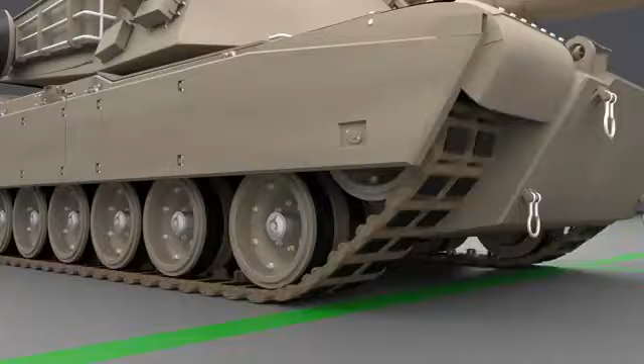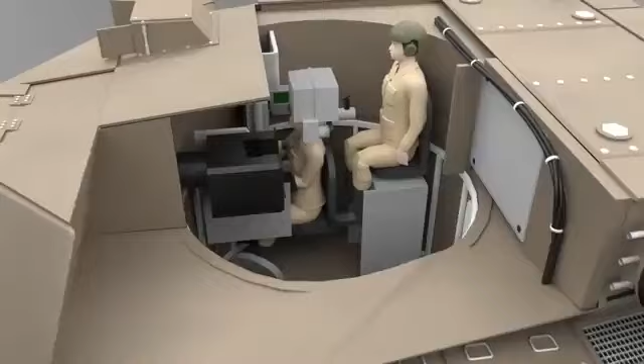For today's video, we're going military. Let's look at how a tank works. We're going to focus specifically on the American M1A2 Abrams tank. We'll look at the caterpillar tracks, the turret, where the crew sits, and the engine in the back that powers it all.

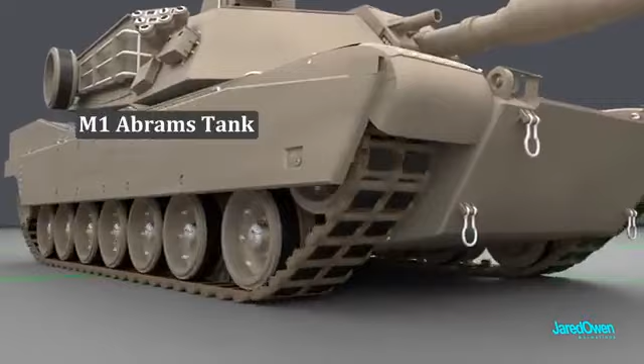The M1 Abrams tank was introduced in 1980. The tank was named in honor of United States Army General Creighton W. Abrams Jr., who was a commander in the Vietnam War. The idea was to keep it low to the ground so it was harder to hit. Angled sides on the tank allowed enemy fire to deflect off the side.

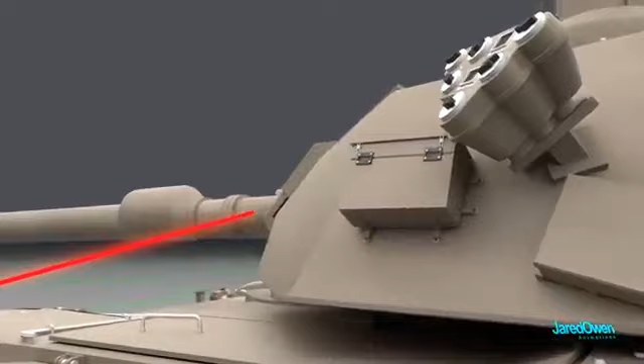It's a bit cozy inside, so I hope you're not claustrophobic. During operations, the crew may spend hundreds of hours inside with very little sleep.

There are many versions of the tank. We have the M1, then came the M1A1, and then the M1A2. There are also minor variants with many different enhancement packages, but to keep things simple, let's just focus on these three major versions. They look very similar on the outside, but there have been plenty of improvements to items such as the armor, electronics, and weapons systems. Each new version is generally heavier and slower, but the increased tech makes up for it. For the rest of the video, I'm going to focus specifically on the M1A2 Abrams tank, though some of what I say will be true of the previous versions as well.

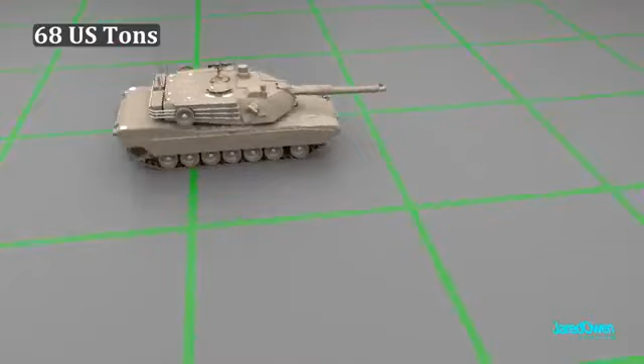Let's look at some specs. The height is 8 feet, the length is 32 feet, and the width is 12 feet. For comparison, here's the size of a person. This tank weighs a whopping 68 US tons, equal to about 35 cars. Even with all that weight, the tank is capable of speeds up to 42 miles per hour.

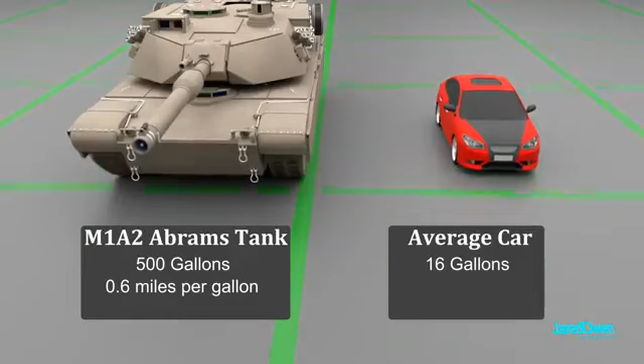It has a fuel capacity of just under 500 gallons. For comparison, most cars can only hold about 16 gallons. But tanks need all that fuel because they only get about 0.6 miles per gallon, compared to the average car at 25 miles per gallon. So it's a gas guzzler, but it's heavy and powerful.

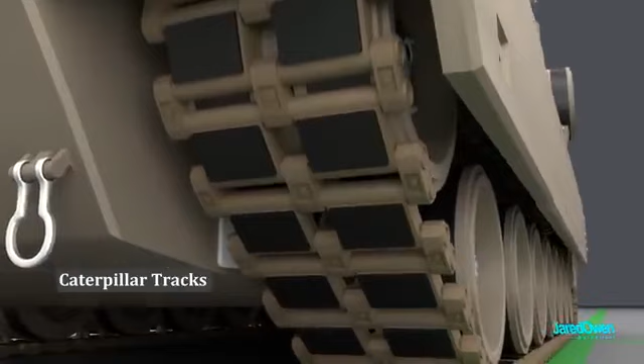Let's look at some of the features of the tank. We have the caterpillar tracks, the wheels—there are 7 on the ground on each side—the main body, which is called the hull, and the turret, which is the part that spins on top and holds the weapons and other equipment. The engine is housed in the very back. The tank holds a crew of 4: 3 of them are inside the turret, and 1 is way up front.

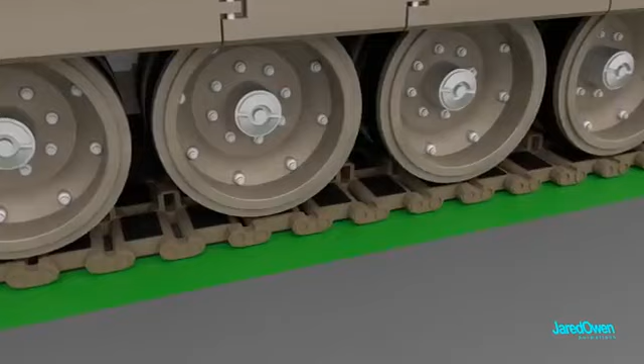Now that we're familiar with the outside of the tank, let's look at more specifics, starting with the caterpillar tracks, sometimes called tank treads. They are made of steel with replaceable rubber pads. There are 7 road wheels on each side of the tank, a raised idler wheel in the very front, and the drive sprocket in the back. This one has gear teeth on it, and it's the only one powered by the engine. It moves the entire track along.

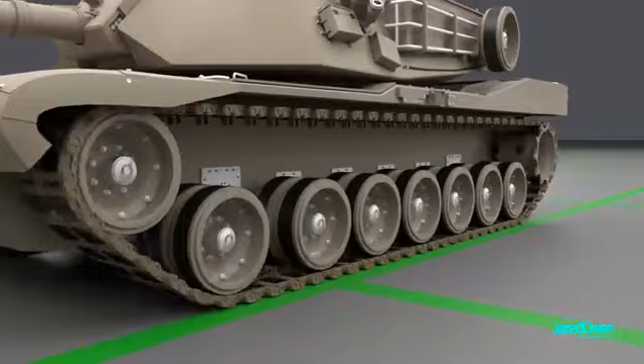The other wheels spin freely as the tank treads move past them. The road wheels also have suspension built into them. The whole reason we use caterpillar tracks is to allow the tank to go over very rough terrain.

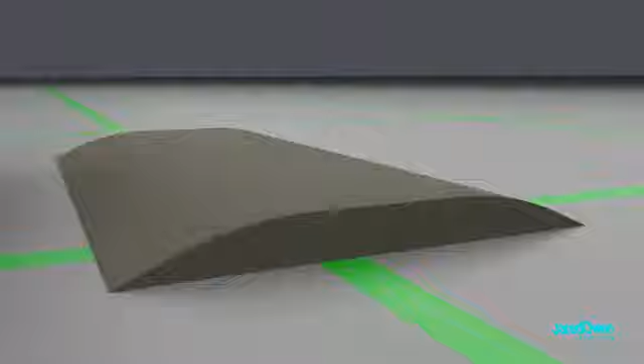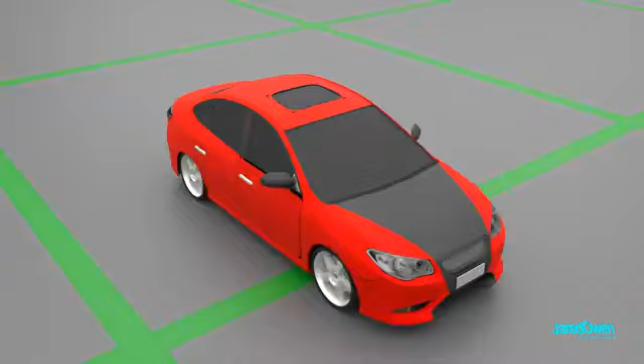Most barriers don't pose any problem for the tank to pass. Regular vehicles with 4 wheels have limited surface area in contact with the ground, so they can get stuck much easier—that's why it's a good idea to stay on paved roads. The tank, on the other hand, has a much larger surface area to displace all of that weight, so obstacles in the way are usually not a problem.

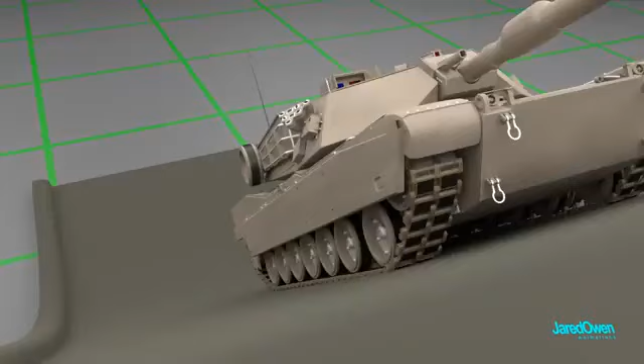The tank can even climb some very steep hills, and most of the time it's still a smooth ride for those inside. The tank is steered by altering the speed of the tracks. For example, to turn left, the right tracks need to move faster than the left tracks.

Unfortunately, the caterpillar tracks are the most likely part of the tank to break. The good news is that the tank usually carries tools and spare parts so that broken links can be replaced and the tank can keep moving again.

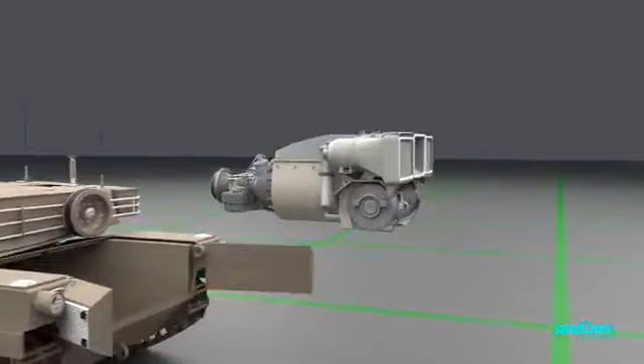Next up is the engine, which is in the very back of the tank. For repairs, the entire engine can be lifted up out of the tank. This is an AGT 1500 engine, which can run off several different fuels, but most of the time it runs off jet fuel.

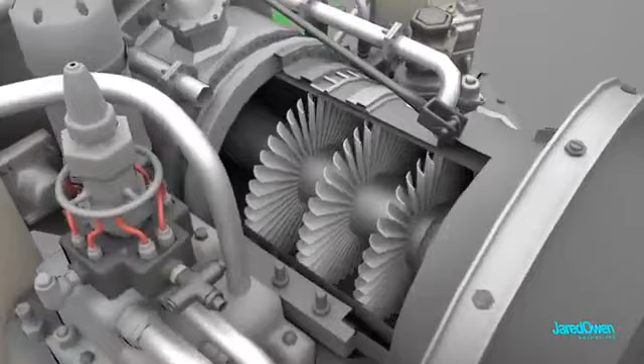In your car, you'll find what's called a piston engine, with these pistons moving up and down to rotate the shaft. But in the tank, you'll find a turbine engine. This one works a little bit more like a jet engine that you would find on an airplane. However, this engine is actually fairly quiet, which is important so you don't give away the tank's position to nearby enemies. The engine gets very hot, so these two side cooling units help remove the heat. The exhaust comes out the back, so stay clear when the engine is on.

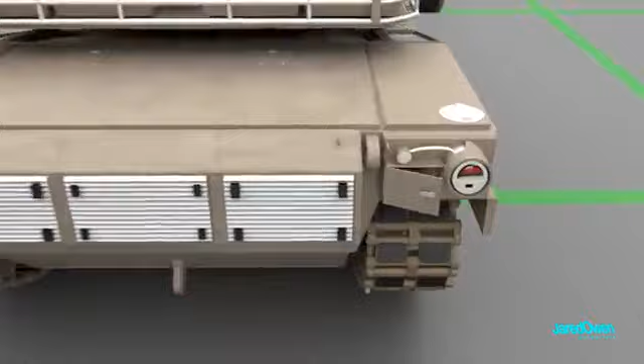There's actually a phone on the back of the tank. This way, soldiers on the outside can communicate with the crew on the inside. The sides have armored plates called side skirts to protect the wheels and the caterpillar tracks. These can be opened up in sections for better access to the road wheels. On the front, there's headlights here and 4 tow hooks down here.

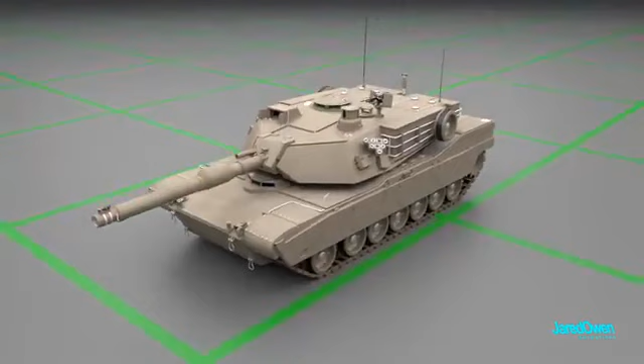Remember, there are many different variants of the M1A2 Abrams tank, so another tank might have slightly different features on the outside. This top part is called the turret. It can rotate all the way around in about 9 seconds.

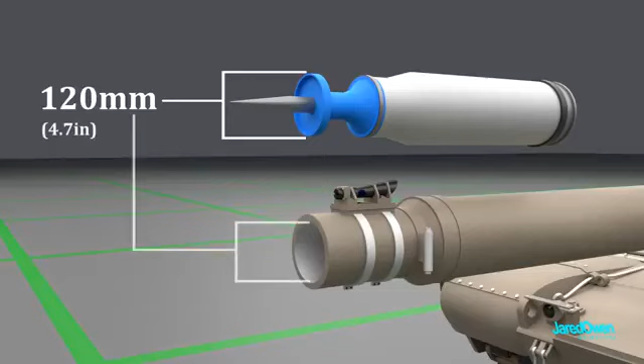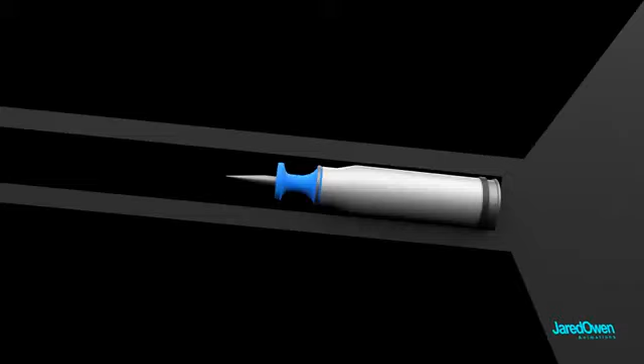This is the main gun, which is a 120mm smoothbore cannon. This means that the shells or ammunition are 120mm, and so is the bore, or the hole, that it goes through. The shells leave the barrel at about 3,500 miles per hour. It can hit a target 2 miles away.

The automatic stabilizers allow the gun to stay locked on targets even while going over rough terrain. This way, the driver doesn't have to stop every time the tank needs to fire. The tank can even spin in place while the main gun remains locked on target.

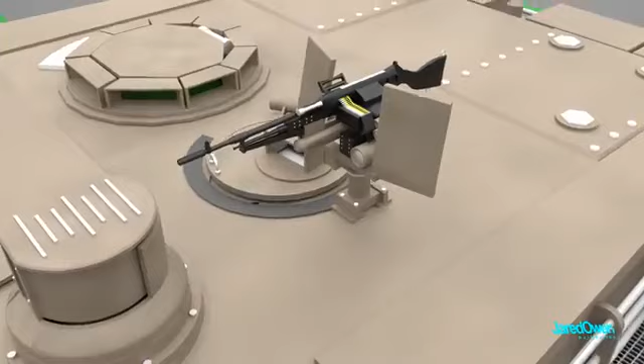Right next to this is the smaller coaxial machine gun. Up on top, there's usually at least one more machine gun to operate. On the sides are smoke grenade launchers. There's one on each side of the tank. These make it harder to be seen during combat.

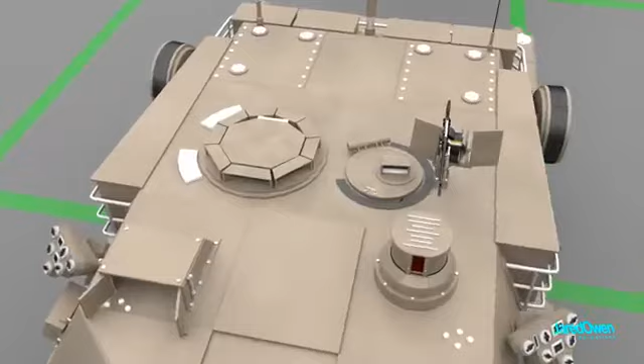There's not much room for equipment inside of the tank, so oftentimes the crew will put it out here on the bustle rack. There are 2 hatches on top of the turret, the commander's hatch and the loader's hatch.

Inside of the turret, you'll find 3 out of the 4 crew members. It's a bit cozy in here. The gunner sits down below to the very right. The commander sits directly behind the gunner. The loader is off to the left of the main gun. When the turret rotates, all 3 of these crew members rotate with it.

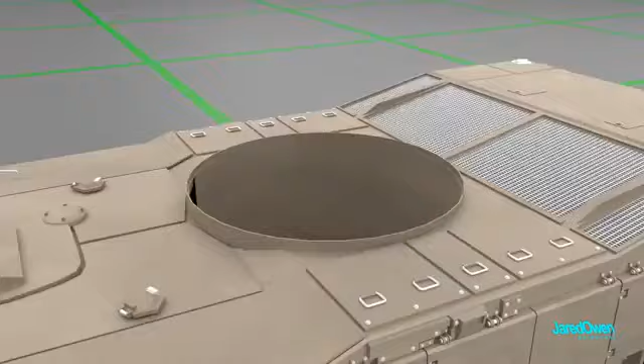Underneath here, this is called the turret basket. The seal between the turret and the hull is so good that it can protect the crew inside in case of chemical or nuclear warfare.

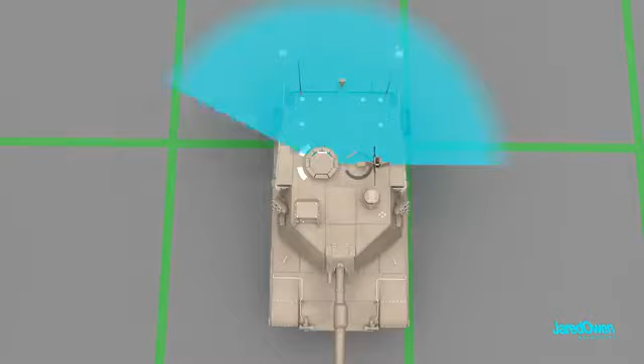A few more things I want to show you about this tank. The commander can see 360 degrees around the tank through the viewing ports.

The shells for the main gun are stored in a large compartment on the back of the turret. The loader can then open up an access door, grab a shell, and load the main gun. This must be done quickly during combat situations.

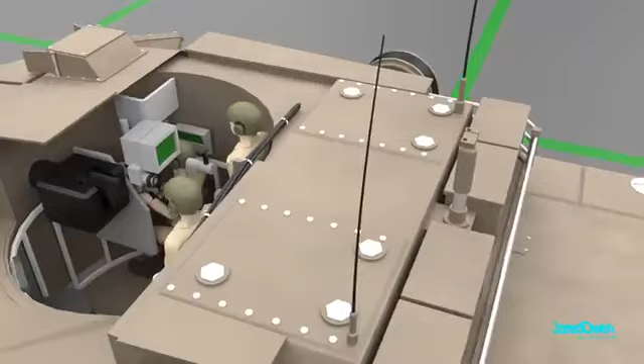If any of the ammunition is ignited, the panels on top are rigged to blow off so that the explosion goes up instead of into the turret where the crew is located.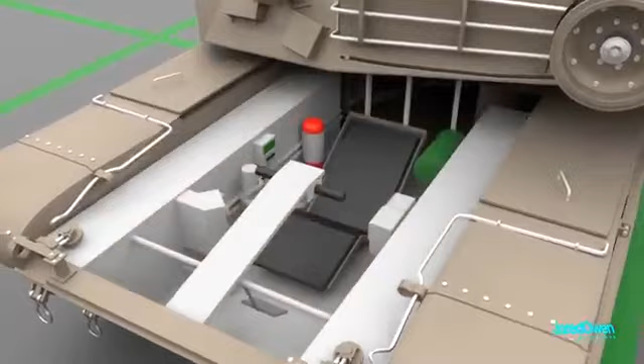The driver sits up at the very front. There's a hatch up here that can be opened to go inside. There's not much room up here either, so the driver has to lay back in the seat. The controls are up here, and 2 brake pedals down here. There's no gas pedal in the tank, just use the 2 black handlebars for acceleration and steering.

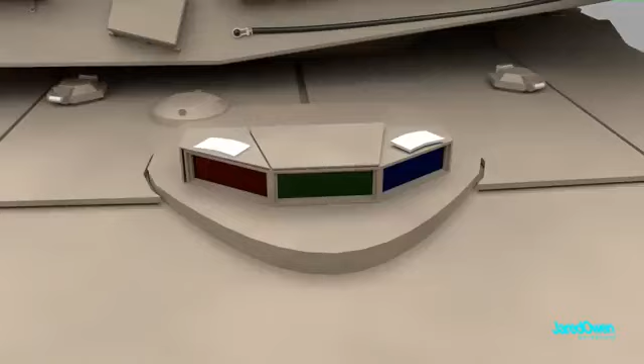The driver also has periscopes that allow him to see a 120-degree field of view. Usually the driver enters through the hatch up front, but if needed, the driver can climb into the turret and then through a tiny door in the basket and into the seat.

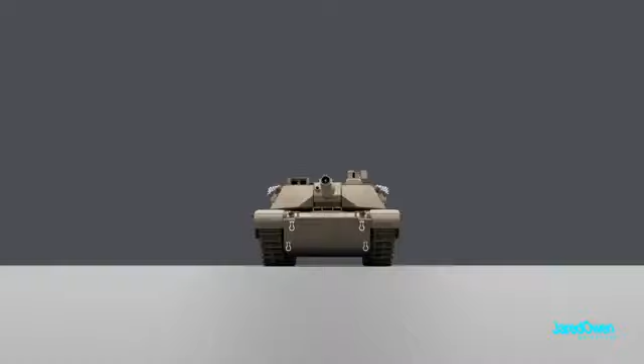The United States isn't the only ones to use the M1 Abrams tanks. It's been sold to other countries such as Australia, Egypt, Kuwait, and Saudi Arabia. The M1A2 Abrams tank has been in use for almost 30 years now. At some point it may be replaced, but for now it continues to be the main battle tank for the United States military. My name's Jared and I create 3D animations on how things work.